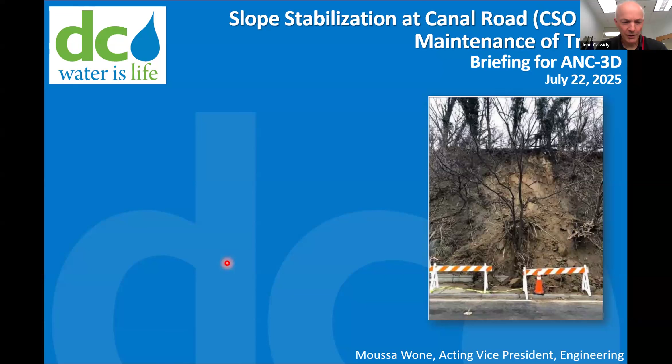Great. Well, thank you for coming back to us. Okay, good. I'm glad to see John already has screen sharing privileges. Great, so we're good to go, and you guys can see the screen? Yep, we're good. Yes, we can.

So we have a very brief presentation just summarizing what we told you July 2nd, what the comments were, and then how we're proposing to address them. We've made adjustments to the approach moving forward to hopefully improve traffic conditions in the area.

So the project we're talking about is basically slope stabilization on Canal Road, from the Georgetown University entrance approximately to the Foundry Branch Trail at the Glover Archbold Parkway. The concept is to remove the vegetation from the site, scale the slope, which means removing loose materials, and then install a bolt and mesh system, kind of like you'd see on highways. At the end of the day, brush, grass, and small trees would be able to grow back through the slope.

The general process of how the work would be conducted is we'd set up some type of MOT, maintenance of traffic, in order to do the work, remove the trees and vegetation. Scaling is basically removing the loose materials to prevent them from falling from the site, install the bolts and mesh, and then do the restoration.

Critically, this is the Potomac River Tunnel project. There is a shaft site at the top of the hill on Georgetown University's property. That shaft starts in about January of 2026 in order to meet the consent decree deadline, which is in 2030. So the idea is to get this slope stabilization work done before the tunnel work starts, because that's a far more logical and safe organization of the project.

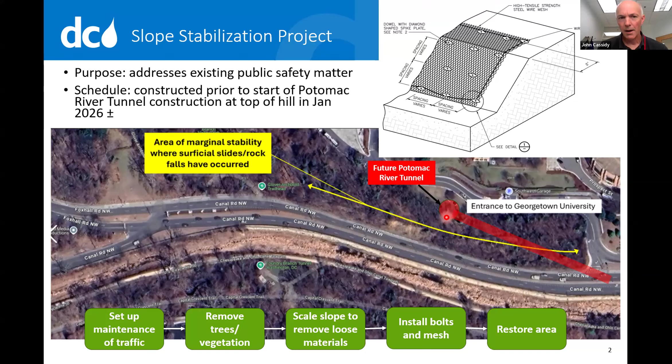What we told you before: so on July 2nd, when we met, I guess the concept was to work...

This is the area where the slope stabilization is intended to occur. This is a little cartoon we drew just to illustrate the road conditions.

The concept for the vast majority of the work was to close the sidewalk and run a shuttle, close the first westbound lane on the north side of the slope, and have 3 lanes of available traffic, with one of those lanes reversible. During evening rush there'd be westbound traffic, and all other times eastbound traffic. So 3 lanes would be open, the sidewalk closed, and the overall duration was in the neighborhood of 5 to 6 months.

That enabled us to work from the bottom of the slope and the top of the slope at the same time to try and accelerate the project.

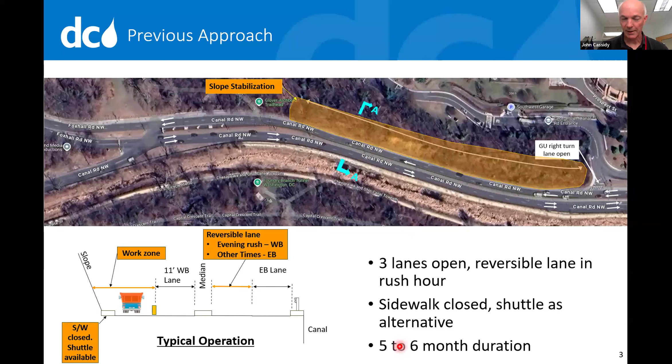The shuttle that was proposed at the time would stop at 44th Street, on a route ending at the Georgetown University entrance, in the closed lane we would operate. The shuttle would run 24 hours a day, suitable for bikes and ADA needs. It would normally park here; if a pedestrian came up wanting to use it, they'd get on and the shuttle would do the loop. If a pedestrian came from the other side, there'd be a sign with a number to call, and the shuttle would go pick them up and take them to the other side. That was the concept at the time.

So what feedback did we get? We've summarized it into categories: comments about the slope stabilization project itself, transportation corridor comments about generally improving the entire area, and other comments that we were able to address.

For the slope stabilization comments, there were concerns that traffic impacts of closing the lane could be significant, extending to regional areas like M Street, Chain Bridge, the Key Bridge, and other locations. There's dissatisfaction with the shuttle. DC Water also has another project to repair deficiencies and holes in a sewer called the Upper Potomac Interceptor, near the Chain Bridge.

The comment was we should coordinate those projects so they don't adversely impact traffic at the same time. We're calling these transportation corridor comments, and DDOT will address those at the end of this presentation. The basic idea was, if we're going to disrupt traffic on Canal Road, this is a once-in-50-year opportunity to improve the overall corridor, widening the sidewalk and making ADA improvements.

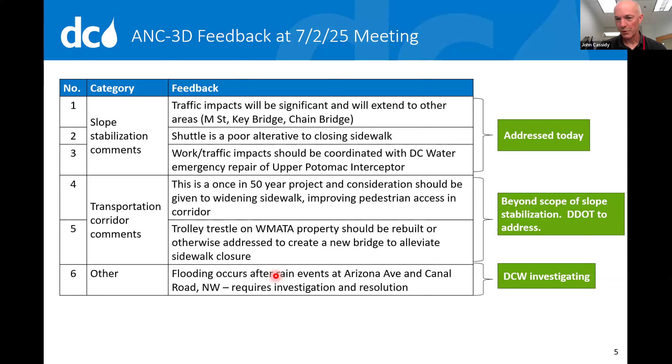We thought we'd go back to square one when we analyzed this, looking at the amount of traffic on the site. These counts are based on data from a while ago and within the past 2 weeks, covering pedestrians, bicyclists, and vehicles. There's a neighborhood of 200 to 250 pedestrians and bicyclists during daylight hours, 6 a.m. to 7 p.m., and about 14,500 cars running through the site.

Our overall philosophy in doing this project is that the corridor is narrow, fixed by the slope on one end and the canal on the other. The prior approach of having a reversible lane is not really desirable, because from a public safety and traffic point of view, people during dusk have to react and get into a lane that isn't intuitive, creating a risk of accidents.

And this is just the reality: the slope is not stable. There have been failures on the slope. When we do the slope stabilization, it becomes less stable, and we have to control what's coming off the slope, which presents a risk to pedestrians and bikes.

Our feeling from the engineering side is we need to keep people away from that. That is not a safe condition when we're doing the slope stabilization. Our philosophy is to try to keep people as far away as possible to maximize safety and minimize the impact to the largest number of people. So what are we proposing to do instead?

Could I jump in with a question about the traffic counts and when this was done? Is this recent or from before? Matt can maybe answer that, but they were done twice in 2017 and then literally within the past two weeks, and the numbers were very comparable, within 5% of each other. So we've not seen a big change.

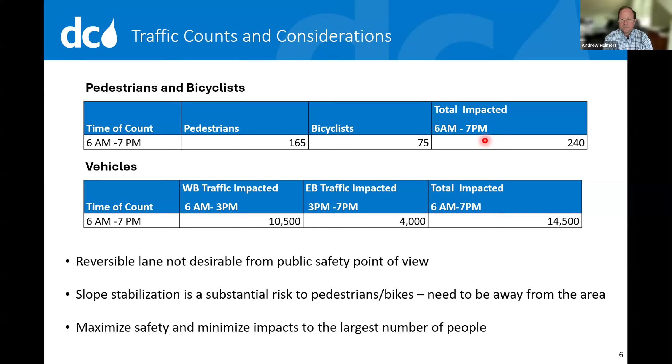The concept we're proposing for most of the activities, with some limited exceptions, is to work primarily from the top of the slope. Crews will be working from the top on Georgetown. That would enable us, for the vast majority of the time, to keep 4 lanes open on Canal Road, not have the reversible lane, and in effect not substantively impact traffic.

The concept for doing the work is that there'd basically be two barriers: one, a typical Jersey barrier, and a rock fall rated fence on the sidewalk, that'd be the primary barrier. Then what the industry calls drapery—not like curtains, but a very fine mesh material—suspended from the slope while the work is being conducted, to minimize material coming off the slope. When it does come off, it mitigates its energy so it doesn't tumble into the roadway, instead confined behind the drapery. If for some reason the drapery can't catch it all, it's confined behind the rockfall primary barrier.

Given the limited right-of-way, I know there's a concern about this, but we are still proposing to close the sidewalk and run the shuttle, and we have some slides after that. So basically the concept is 4 lanes open and the sidewalk closed for the vast majority of the time. Because we can only work from the top of the slope, it's about a 6.5-month duration instead of the 5 to 6 month duration. There are some limited periods of time, which we could provide in more detail.

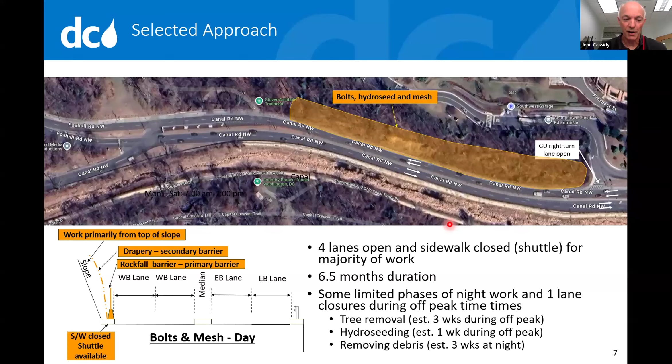There's temporary maintenance of traffic, right? I think one of the advantages is it doesn't require setting up this reversible lane where every day you're trying to flip traffic, literally every day, and having vehicles try to navigate that. That seems to greatly improve safety. It provides a consistent way of doing it. And it also doesn't require doing that adjacent to the Foxhall and Canal intersection in addition to Georgetown University's entrance, which, while technically feasible, seems like a bad idea and has the potential to confuse drivers. So for pedestrians and bikes, this is not an ideal solution.

We completely admit that, but the right of way is limited. We have the canal on one side and the slope on the other, and that's the width we have to work with. There are 3 options on the table that we would make available and publicize. Obviously there's the Reservoir Road route, up to the north. That is longer, but it's available. We are still proposing to run the shuttle in case there are ADA people who need to get across, or pedestrians. Also available is the Foundry Branch tunnel underneath Canal Road that gets down to the Capital Crescent Trail. So this is the proposal for managing pedestrians and bikes.

There is a recognition this is not ideal. Most people when they see this would say, 'I don't want to do this, I'm going to find an alternate route.' And I'm afraid that's highly likely, and I'm not sure what beyond this we can do, given the limited right of way and this choke point through this area.

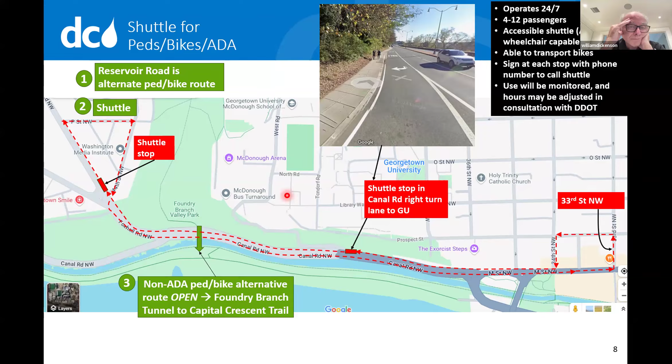So why did we propose this approach? This is the previous approach we had selected, and this is where we are today coming back with you. The duration is not as advantageous, it's going to take a little bit longer. However, all the traffic and safety impacts we think are substantially better. For local traffic, those 14,500 cars in the prior approach would have lost a lane all the time. Now there's minimal impact, we're not losing a lane during the vast majority of conditions. I think the regional traffic impacts are mitigated because we're not closing that lane anymore, so we won't have cascading issues going to M Street and other locations. Traffic safety is improved because we're not doing that reversible lane, and we're still having the same impact to pedestrians, which is difficult to mitigate in a different way.

So the bottom line is we're proposing this approach because it reduces the impact for the largest number of people. It reduces the regional impact and maximizes safety. It gets pedestrians away from the slope stabilization work.

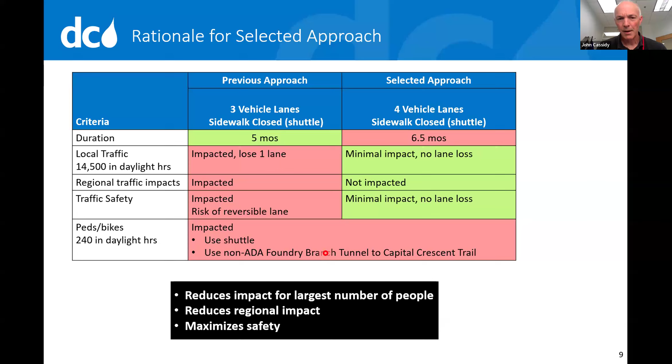One thing we were asked to come back and address is that DC Water has a project up near the Clara Barton Parkway, near Chain Bridge, repairing a failing sewer called the Upper Potomac Interceptor. This is our project down near the slope stabilization, separated by about 3 miles. The schedule for this project is September to December 2025, pending permits from the Park Service and DDOT. There are 3 different maintenance of traffic setups possible, some involving closure of a shoulder during the day, and some involving closure of a lane at night. For our slope stabilization project, we're proposing to start end of August, early September, running through January, February.

So yes, they will be concurrent. However, with this new maintenance of traffic approach we're proposing, where we've got 4 lanes of traffic open all the time, there's minimal impact between the 2 projects, given that we're keeping 4 lanes open and given the extent of separation between the projects.

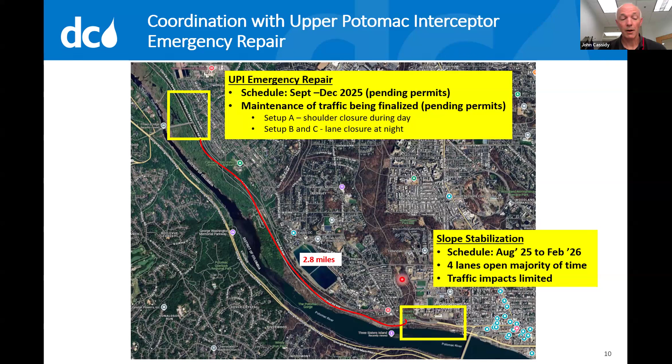Yeah, and I would just add one thing: eastbound traffic is always going to be 2 lanes through the Canal Road area, even off peak. For our work, right Mac? Yeah, correct. I'm going to do this in reverse, actually, if that's okay.

One of the other items we were asked to follow up on is a flooding complaint at Arizona Avenue and Canal Road, not near the Canal Road slope stabilization project. There are basically 3 catch basins in the area. We had crews out there today to clean the catch basins and the interconnecting sewers. What they found is all those catch basins and interconnecting sewers go into a 72-inch, or 6-foot diameter, storm sewer that runs out into the river. That 6-foot diameter storm sewer was found to have a bunch of debris in it, so we're getting ready to clean that. We don't have a definitive timeframe for that yet.

Likely this weekend. We're trying to get it in before it rains next, but we've made some progress on this and are trying to resolve this issue.

Our next step, pending getting comments, is we'd like to go to the ANC meetings and present to the full ANC. We're meeting with the ANC commissioners for ANC 2E tomorrow to go through the same approach.

We would then conduct broader outreach, and maybe the outreach staff can comment on that. Our goal is to start the work in late August, early September timeframe, pending permits, and the work would continue through the fall and terminate at the end of winter.

We're trying to do this to minimize overall traffic impacts and maximize the safety of pedestrians through the area. I think that's the end of our presentation. Ready to take questions. Thank you.

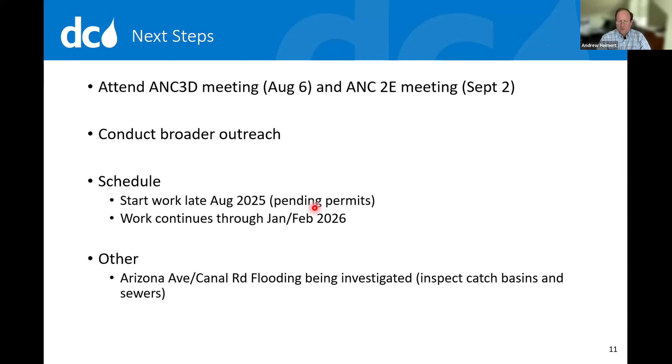Thank you, that's really helpful. Maybe, unless there are very specific technical questions, DDOT would like to add their part to this, and then we can have broader comments and questions, if that's okay.

That makes total sense, because I don't know if it's Christian or Christoph who would be talking for DDOT, or someone else.

Oh, I can talk. So the first part that John mentioned was the concern about the sidewalk, using this opportunity to widen it. Unfortunately, it's just not part of the scope, since this was transferred over to DC Water to obtain. I actually spoke to George Brannion, who many of you probably know personally by now, and did an assessment. It's a very tricky area to expand.

There are elevation issues, and also concerns with NPS right of way. It would basically be like a capital-level project that would probably cost millions and millions of dollars. So right now it's not in our scope to do.

But I would reiterate, if there are any issues of maintenance on existing portions of the sidewalk that are just chipped or uneven, we can work on making sure those are rectified, especially if there are any trip hazards in this area. But in terms of actually expanding the sidewalk to 6-7 feet, or meeting those ADA compliance pieces, that's very unlikely at this time.

Well, and you go out then and clean the 3 feet of debris that's now on the sidewalk, Christian. I'll say that right now.

Yeah, so as part of the scope of this project, obviously we're going to be down on the sidewalk. Currently there's a curb-length of sidewalk, and then there's a bunch of debris next to a short kind of curb wall, if you will. Obviously we're going to clean all that up, and remove those temporary Jersey barriers that are currently obstructing the width.

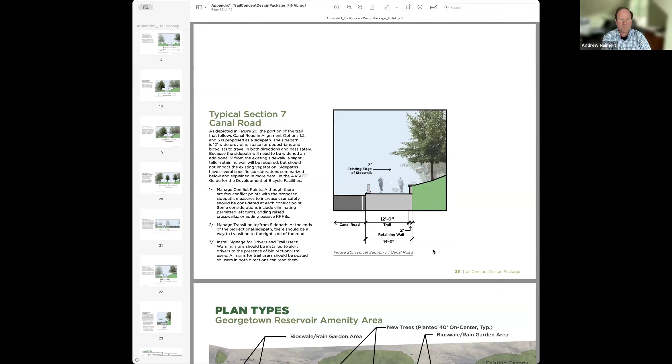Just to be clear, section 7 is actually- I can scroll up if needed, but that's here. So at some point, DDOT seemed to think this could actually work. Here's section 7, this stretch here along Canal Road. So I'm a little bit surprised.

Can you- anyway, go. Oh, do you want me to put that back up, Tricia? Yeah, because I've walked that section many times. That little knee wall is not 7 feet anywhere near there.

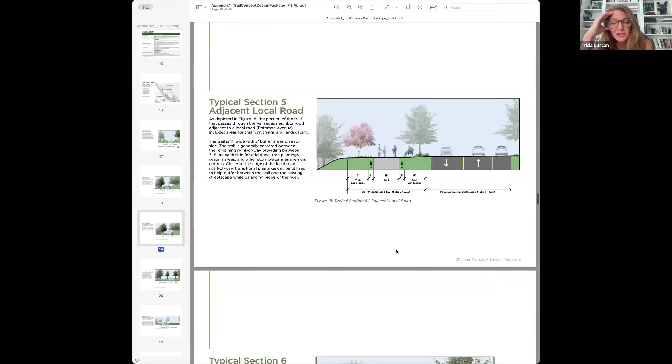I mean, to say that this is wildly disappointing, as we're also about to see the Foundry Branch Bridge torn down, it's like, God bless.

Transportation wise, our section of the city is just cut off. We've got no high frequency bus service. We're tearing out our multimodal transportation infrastructure. I get the constraints of why we need this shuttle, but even after all that, we just have this crappy little sidewalk, some of which has telephone poles right in the middle of it, and a fire hydrant smack in the middle of it.

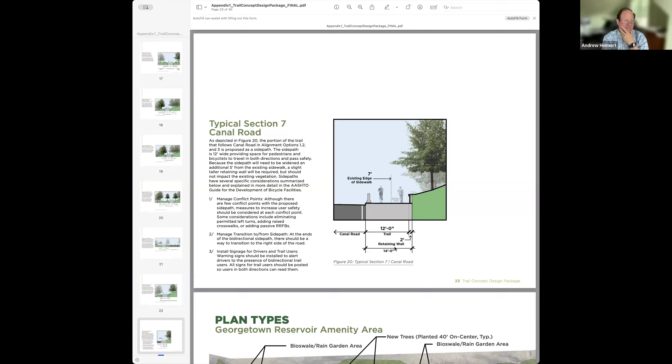Tying into something Commissioner Duncan was just talking about, along that stretch of sidewalk there are telephone poles placed in the exact center of the sidewalk, placed by Pepco with no recognition that other people exist and might want to use that space too. I know we've had this discussion, Christophe, about Reservoir Road. The same thing happens, telephone poles right in the middle of a narrow sidewalk. After going back and forth for quite some time, DDOT's final position was that they were not

Going to make Pepco do anything about that. And first of all, I think that's the wrong decision. I would like to implore DDOT to look at least at making Pepco move those telephone poles to some place where they are not monopolizing the sidewalk. One of the things that is particularly frustrating to me, getting back to the Reservoir Road situation, is that there are brand new replacement telephone poles put back in exactly the same spot.

My question is about the shuttle - I'm thinking you might be right that a lot of people are going to just avoid this. Can we go back to the map of where the shuttle is going to be waiting up in Foxhall? Because there are going to be people over there concerned about something like idling in front of their home. I'm wondering if...

So the reason we picked this is there's a parking lane here, and we recognize the issues with idling. The other thing we were evaluating is there's a Jersey barrier here closing off a portion of 44th Street right before this driveway of this house that seems farther away. That's the other possibility we were evaluating for the shuttle to sit when not in use - farther away from houses.

I'm gonna throw this out there. Let me see if I can annotate this. Right here, let me see if I can make this a color - see where my cursor is drawing? This is actually part of the old existing trolley trail, owned by DDOT I think now. This whole area has been gravelled over, and I'm wondering if you can skip this whole part here. The bus - this would actually be a nice little safe bus stop here.

Tricia, if you're drawing on the screen, I'm not seeing it. There's some delay. It's like purple, I don't know why it's not coming through. Oh, I see. Yeah, thank you.

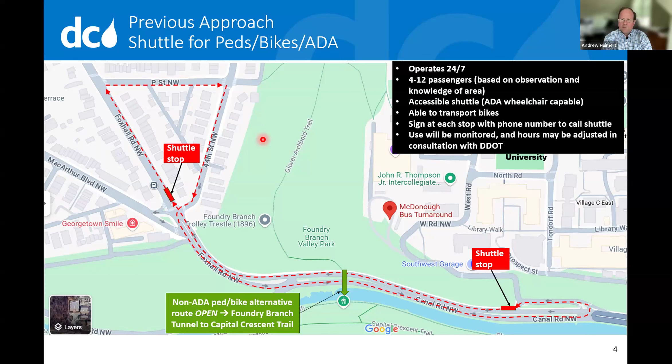All right, I think we're getting close to the end of this discussion. We're well past the time we'd allocated, but it was definitely an issue of concern to the community, so I think it's time well spent.

I'll leave John and others with one thought. I totally appreciate the usage statistics. I think one of the tensions here is that probably all 240 of those bicycle and pedestrian users, or maybe 80 or 90% of them, live within half a mile of here, and they're either running or jogging from Georgetown or the other direction, or bicycling. The 14,000 drivers going through this intersection, the vast majority are just getting in their cars and heading out to Maryland and Virginia.

As important as those commuters are to the district's economy, it's a little bit tough to take that the local pedestrians and cyclists have to take a hit to primarily provide more convenience to commuters who are just racing out of our city. So that's my take on it. I get where you're coming from, but I think it's a little bit difficult to stomach the idea of just shutting off the sidewalk for 6.5 months so we don't have to close a lane.

Just one pushback - we had that extensive debate in our office, and I understand where you're coming from. We were also very concerned about doing the slope stabilization with people immediately adjacent to it. So if there were some way we could keep the sidewalk open, which would be very difficult, almost impossible to do, we'd be holding people at that sidewalk for extended periods while the work was happening, then having them escorted through, stopping the work.

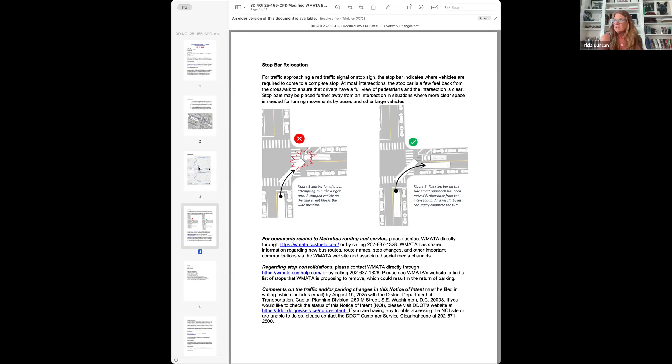It says move stop bar at Q Street southbound at MacArthur Boulevard back 25 feet to accommodate for new route C85 bus turns. Numbers 3 and 4 are signage updates - they're going to have a no parking, no standing sign. Number 4 is update existing no right turn on red, southbound Q Street for right turns onto westbound MacArthur Boulevard, to be all day. Number 5 is a signage update to existing no right turn on red on westbound MacArthur for right turns onto northbound Q Street, to be all day. And number 6 is parking restoration, right there where the old bus stop was.

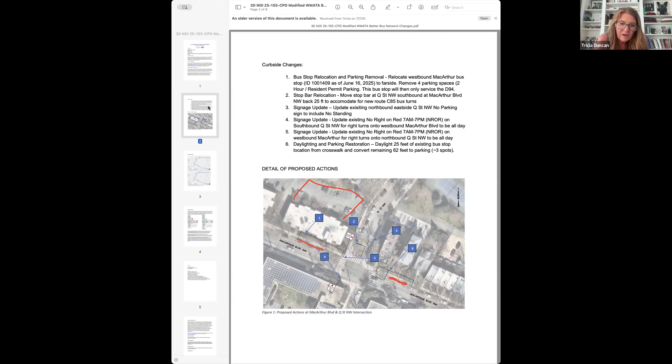Now if you scroll to the next page, this is where things get a little annoying, because this NOI doesn't show the D94, which uses that bus stop there. So this is wrong. And now that I'm looking at the old maps that they originally showed us, it shows - well, these are both northbound, they're missing some maps. So I am going to be clarifying with them that when this route goes the other way, it actually goes on this stretch here, where I don't know if the red is showing up in time.

But in one direction, the D94 is supposed to do this also, but the D94 will be the one using this stop here. That is correct - I just want to say that the D94 will go down Foxhall and then turn onto MacArthur, as you're showing in red. Yes, and so there used to be a bus stop here, but the C85 is now going to be using the bus stop, which the students use anyway, where the star is.

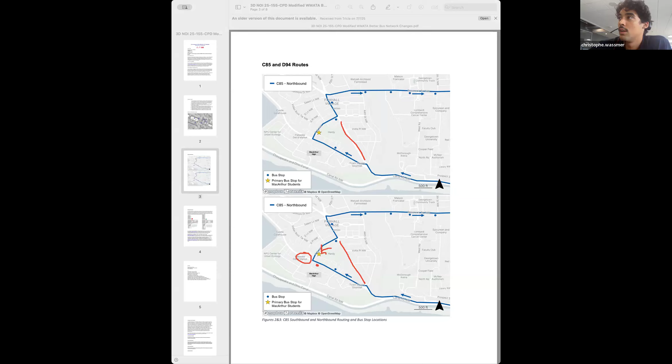So they're moving this bus stop over here for the D94, and the C85 is going to be using the bus stop where the star is. The D94 will also be using that on the route into Chinatown. Yes, when it goes downtown, they'll also be using that stop.

I have a question here. If by moving the bus stop to the other side of the street of Q Street or at the intersection, where will the C85 stop when it's going in the directions of the arrows shown on both of these illustrations? Where the star is. So it'll turn the corner and then stop.

Yes, and this is where I've been - I sometimes go and monitor the buses after school at the high school. This is where the students congregate. It's safer for them to be at the park because there's lots of space for them to hang out. And this change allows a lot more room for the bus to make that right turn. I can see why they're doing this.

Now, Christophe, the D94 map does not show use of Foxhall Road. It shows it going on Q Street, but... Well, it does in one direction and then it uses Q in the other direction. That is correct. It uses Q heading downtown to Chinatown, and then it uses Foxhall in the other direction, heading outbound.

The map, if you go online on the bus - I mean, it draws it from stop to stop, so it sort of goes across the middle of it. It actually uses the Foundry Branch trestle, oddly, at least that's what it looks like. So that map online is wrong, and the maps that they had during the Better Bus thing are correct. So I will be pointing that out to them.

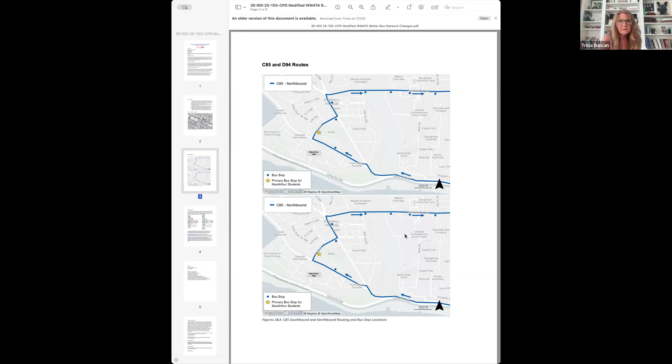I mean, Tricia, it seemed to make sense to me too. I guess the only question would be the residents of those buildings. I am concerned that the residents are going to find out when I post this on the listserv, assuming they read the listserv. Do we know if WMATA or DDOT informs the residents directly through like flyers dropped off at their house? There is no plan for that, like any notification using flyers to the building. But we can - I'm happy to, if there's any contacts for the residents in that building, to reach out.

Okay, maybe I'll go paste a flyer with a QR code to the changes. So it would be a little bit of a shock, I think, if a bus stop showed up in front of your house and you had no idea.

Another aside, I'd been getting a lot of comments that the bus stop in front of the Citibank at MacArthur and Arizona, headed inbound, was taken off of the stops. They don't have a new sign and the buses are skipping it. And it was not on one of the stops to be eliminated by the Better Bus Network. So I have flagged that for WMATA and they are looking into it. I'm hoping it's an oversight, but I guess that could be something that if they do plan on eliminating that, I think it's a terrible idea. It's one of our most used bus stops.

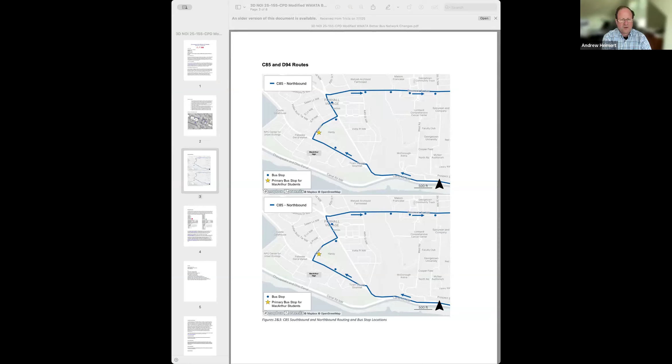I'm going to take a moment to set up the issue, and then maybe Jimmy Sloan can give some thoughts, and if his wife is with him, I wasn't sure because I've been corresponding with both of them. Their thoughts, and then we can have a more general discussion of ideas we might think about implementing. So, about 5 or 6 years ago, the Rock Creek Far West study identified a number of possible projects in ANC 3D and surrounding areas, including 49th Street at the time.

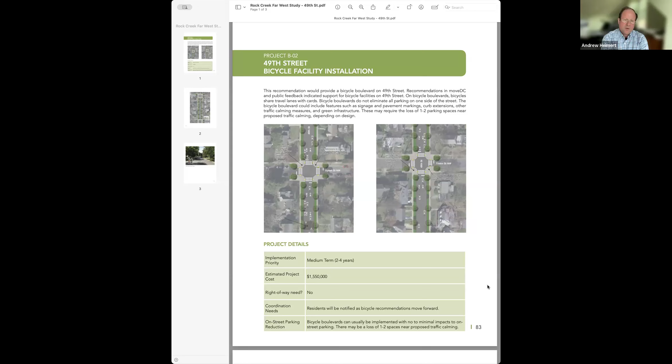I put up these pages from that study. They called it a bicycle facility or bicycle boulevard, which really wasn't what it was about, other than if you make the street a little safer for everyone, it will be attractive to bicycles, and it's a sensible bicycle route if you're going from Wesley Heights to the shopping area in Spring Valley. It's actually a route I biked on today.

For those not familiar, it's a series of 7 or 8 intersections, cross streets, about half of which have four-way stop signs, and the other half only two-way, meaning the cross streets. For example, Sedgwick, I forget if it has stop signs. I understand from previous discussions with DDOT that four-way stops are warranted only where there's sufficient traffic from both streets, and if there's not a lot of cross traffic, you only get the stop sign on the cross traffic street.

So there's a reason why it's not every street. But that probably doesn't help with speeding along here, and it's a relatively narrow street, but just as it's attractive to cyclists and pedestrians, it's attractive to drivers.

DDOT really hasn't progressed this much. We haven't pushed too hard, other than expressing ongoing interest in seeing what DDOT's ideas are. But lacking DDOT's suggestions, we thought we might work on some of our own that we could then suggest to DDOT to explore, and maybe they'll find a few coins under the couch left over from redoing the Arizona bike lanes to think about this.

Why don't I stop there, and different elements, as you can see. Sorry, I should have highlighted bulb outs so you can see at the top. I'll just swing my arrow, since I'm not as adept as Tricia at pulling out a marker, which make the corners a little bit narrower, are among the possibilities.

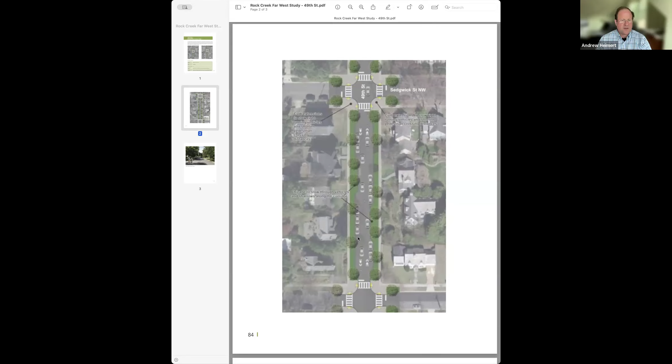Things like speed tables might be in the mix. They've also flagged what are called chicanes, which sort of bulb out the road. So if there aren't parked cars, you have to slow down. It makes the road a little narrower and harder to speed down. So those are some of the ideas. Another one we've discussed in the past would be sort of mini roundabout traffic circles.

Why don't I turn it to Mr. Sloan, Jimmy, if I may, because you had written in and expressed some particular concerns. So if you'd like to highlight a little bit about what you're thinking, that would be great.

Sure, thank you for the time. Thanks everyone for listening in. I have my wife here, she'll be here in just a second, but yeah, would like to just express our concern, our understanding of the situation and the risk factors, and what we think would be a reasonable ask for DDOT to pursue. So I was encouraged by everyone else sharing something, so I'll share something.

Highlighting the significant traffic safety issue along 49th Street in Spring Valley, I think ideally we would push for four-way stop signs along 49th at both Rodman and Sedgwick. I understand that there are maybe some thresholds that DDOT has for doing so, but I think some of the contributing factors I'll speak to below might warrant ignoring those guidelines, let's say.

So in summary, what's the issue? Cars driving dangerously fast between Quebec and Tilden. Just to give you an idea of what that looks like - this is Quebec down here along 49th Street, and this is Tilden all the way up here. That's 1,000 feet without a stop sign.

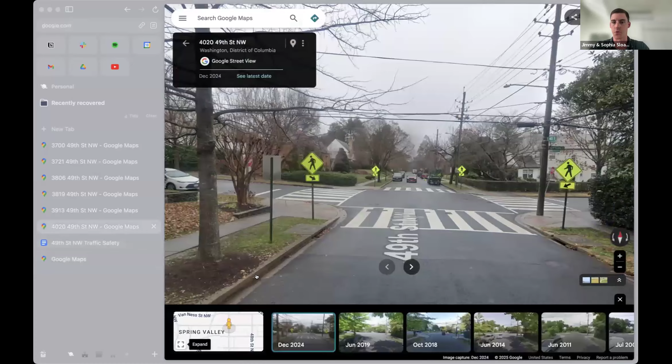Which street has the bright yellow pedestrian crossing signs? That's Tilden - or not Tilden, Upton. So this does have that, right? At least. That is the only other place up here where there isn't a stop sign. So there's a stop sign at Tilden, there's a stop sign at Van Ness, but at least you have those 4 giant people walking signs in both directions. You have none of that at Sedgwick and Rodman.

So contributing risk factors: downhill, as I said, most houses have street parking, hidden corners, hedges, trees - I'll share some screenshots or street views there. Many children in the neighborhood, 8 on our block alone. Very common walking, running, exercising, biking, dog walking corridor.

Lastly, why do we care? We live right in the middle of this. So we see the fastest speeds, upwards of 50 miles an hour, day and night. In the past year, 2 of our cats have been hit and killed by cars on the street. We have 3 young children ourselves and have had numerous scares getting them in and out, including being honked and yelled at just for being on the street trying to get our kids in and out of the cars. And in speaking with neighbors in the last year that we've been here, this has evidently been a common concern for many years.

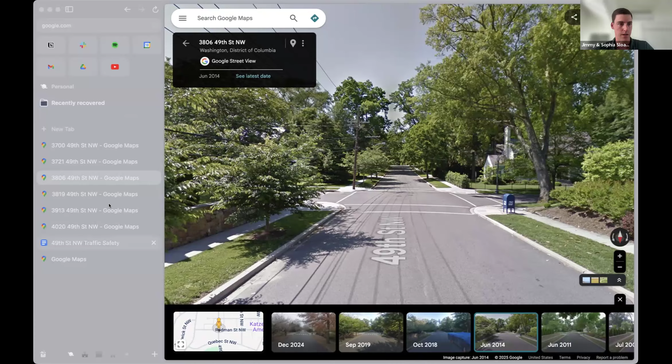This is Sedgwick, looking north, and looking south. And again, this is Upton with these signs.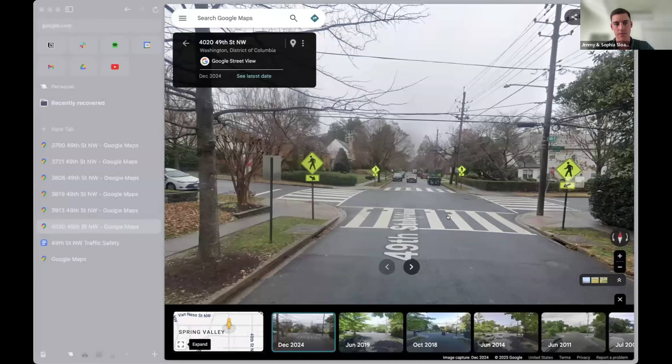So in sum, I think it's an interesting state of affairs where the two intersections that don't have 4-way stops are right next to each other, and produce this 1,000-foot stretch with no stop signs.

Significant contributing risk factors. Obviously, we've lost a couple pets ourselves, but we've taken that as a sign to try to do something about it and avoid something more serious with children or pedestrians in the future. And I think ideally, that's making 4-way stop signs at both Rodman and Sedgwick.

I'm not privy to all the mechanisms of signage and getting things installed, but I would actually think that would be the least capital intensive option, as opposed to doing speed bumps and roundabouts and anything else like that. And I think it's warranted given the situation.

Thank you very much, that's really helpful to see. I don't know if Christophe or Christian, who's kindly stayed a little longer, can clarify - I may be entirely wrong about what I said about stop signs. I don't know if it's accurate that it has to do with traffic flows. Maybe it's a question we can leave for later if no one knows.

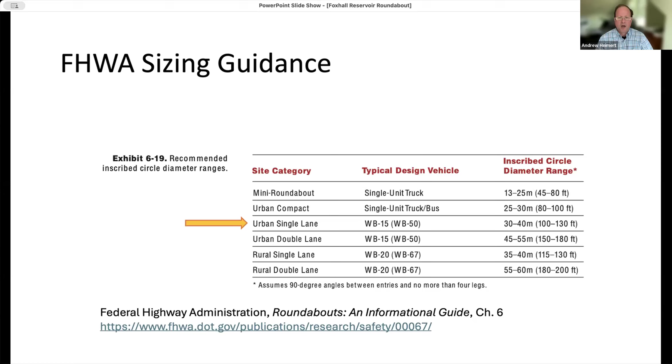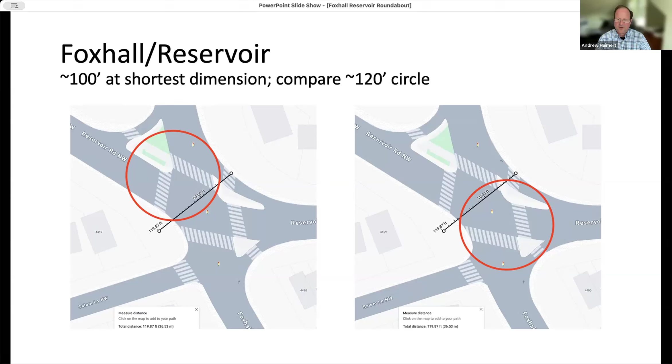Working with those distances in Carmel, Indiana, as an example of where they put in a lot of roundabouts, I took a look at a 120-foot circle. The existing intersection shown is at probably its narrowest point a little under 100 feet, but the right of way, the dim gray lines, is broader, since those are obviously topographical features. So I threw on a 120-foot circle, or maybe fractions of an inch smaller, and played with that in different locations. If you move it a little west, you can get it in more easily; if you move it a little east, you can get it in without cutting too far into what right now are sidewalks but even 15 years ago were not. So on a preliminary blush, if you need 120 feet, the room seems to exist.

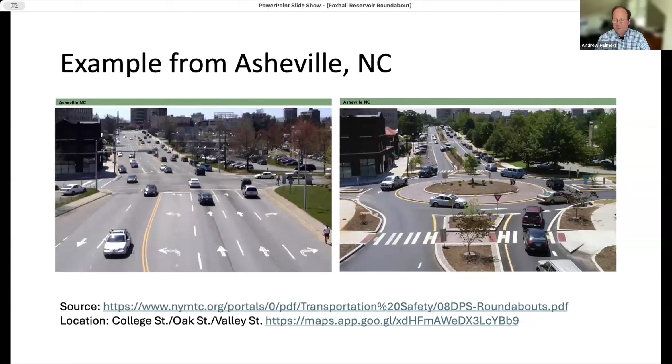Took an example from a study, linked at the bottom. In Asheville, North Carolina, they took what was 6 lanes in one direction, maybe 7, with a cross street that's probably 4 lanes, and converted it to a single lane roundabout, much as one might be able to do at Foxhall and Reservoir. Again, this is all just a might, not a will. I also looked at the dimension of this. It is 110 feet across from curb to curb.

Chuck, I did circulate the letter for comment, pretty sure I circulated it. Did you have any thoughts you wanted to add? No, I think when this issue came up in front of the ANC I was on travel, not there, so I didn't get to vote, and I think it was a tie at the time. So if we bring it back up—we tabled it, so it has never been voted on.

All right, so I think it's time for a vote. I'm prepared to bring it forward at the next ANC meeting and see what the sentiment is of my colleagues. Andrew, your work there is very helpful. Thank you, Chuck. Any other reactions on that while it's on topic? Otherwise we want to keep things moving—we may run a minute or two over, and I hope people can indulge.

Seeing none. Oh my God, did we totally skip—oh, I skipped you, Mark.

I'm sorry, for the traffic calming and cut-through in the Palisades: I want to propose, unless there's objection from anyone on the committee, that we put a very rough cut of a set of questions on GoVocal about potential traffic calming measures in our quadrant of the Palisades. I think we could circulate that via email unless anyone objects or wants to hear more. I'll support that fully, Mark. I think that makes sense.

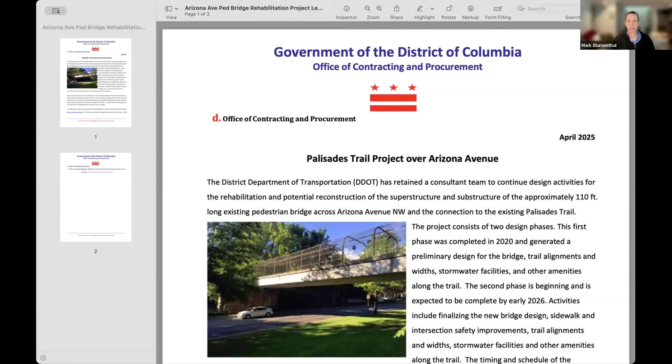It would be super helpful if this could go on the project website that DDOT maintains, or even better, if the verbiage of it could go up rather than just a PDF. I entered a conversation in which someone was authoritatively telling a neighbor there's a final plan, it's on the website, it includes this, it doesn't include that, it'll do these horrible things, none of which were true. It'd be helpful if that information were easily accessible. I'll follow up with an email.

And if they are true, Christoph, you've really been holding out on us, and I'm pretty sure that's not the case. No, that's not the case. I agree 100%, that flyer should be on the website. I'm surprised it's not already up there, and that the language from that flyer isn't reflected on the website.

So I'll be following up again immediately. The dates just need to be updated or hedged appropriately. We'll update the dates as well, make sure everything is correct. Thank you, and I appreciate you clarifying with residents what the current status is. You had it all correct.

I was told very authoritatively that I did not know what I was talking about. It was quite a conversation. But if you can point that to a website, Mark, whether it's Google Maps or DDOT's project website, you can do whatever. Exactly, right. All right, so I think that brings us to an end.

We were a little brisk on the last couple of topics. There is one issue we wanted to raise. The next meeting is scheduled for September 23rd, which is the usual 15 days before the ANC meeting. That happens to fall during Rosh Hashanah, which may be of concern for at least some of our members. If it is a concern, we should come up with a different date, either the Monday before Rosh Hashanah, or maybe the Thursday after.